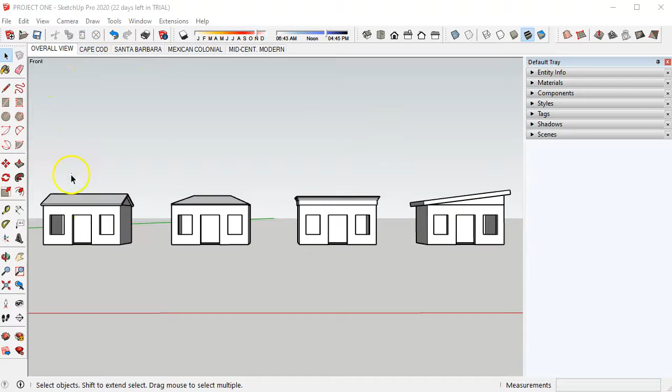In this video, we are creating a window so we can later install it in our openings. I like to get close to one of the homes. I'm going to pick Cape Cod.

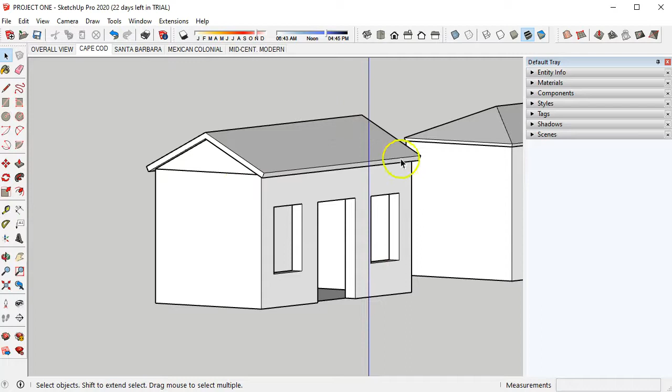If you remember, in our Scene tab, we made our view a parallel projection. If we leave it like that, when we start to orbit, it distorts the house a little bit. You see it looks a little strange up here. So I'm going to switch that back to perspective. I like working in perspective.

I'm going to zoom in back to where I can see one of the openings and draw a rectangle right over the opening like this. I'm not editing anything.

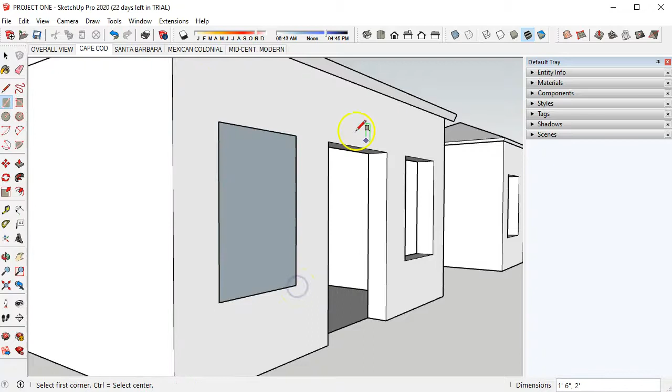I'm going to double pick so I can pick the surface and the perimeter, and then go to my move command, pick the corner, and move it out somewhere around there.

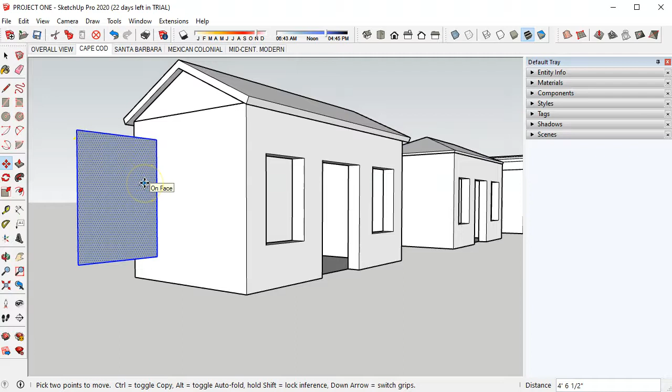Now I want to look in front of this, so I'm going to maneuver myself a little bit here by panning, orbiting, and zooming in. Don't work from a distance like that. Always zoom into your object for detail work.

I'm going to select out here. I don't like working with something selected like that. Don't worry right now, because this is the wrong color. We will take care of that in a minute.

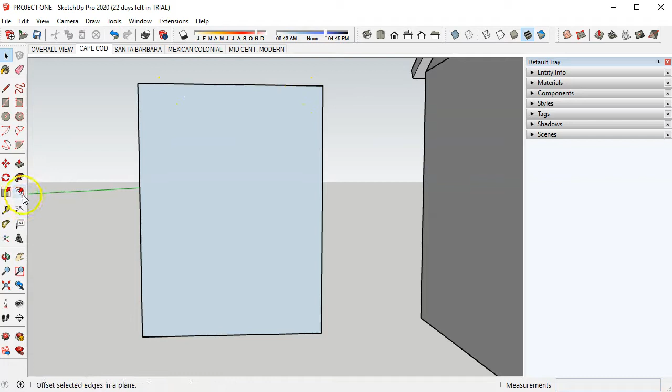To begin making the frame, go to Offset and pick anywhere on the perimeter. Everything is going to be inside the perimeter. If you go outside, it's not going to work and your window will not fit. So inside is where we're working.

So the instructions want you to offset that 3/4 of an inch. Just move it, I'm not holding my finger down. Just move your mouse like this and then type in 3/4 of an inch or 0.75.

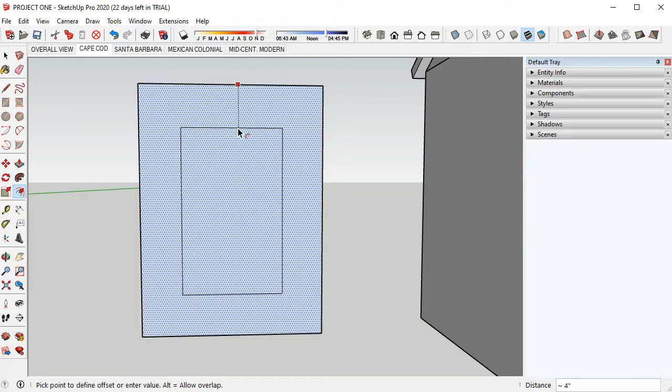We have another offset for the frame. I'm going to pick on that edge that I just created, move it inside again, and type in 1/2 inch or 0.5.

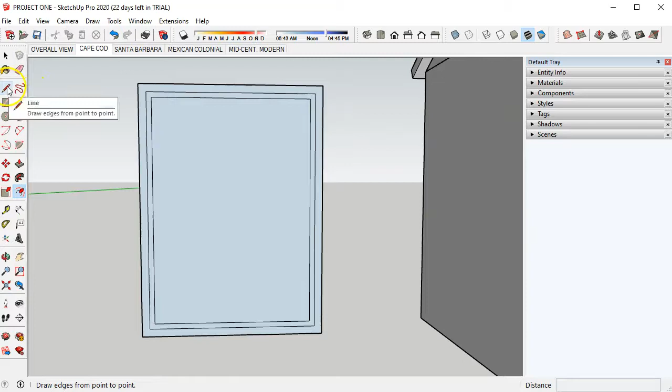Next, we want to divide this inside part equally by picking on the midpoint, top and bottom, and then on the horizontal midpoint from there to there.

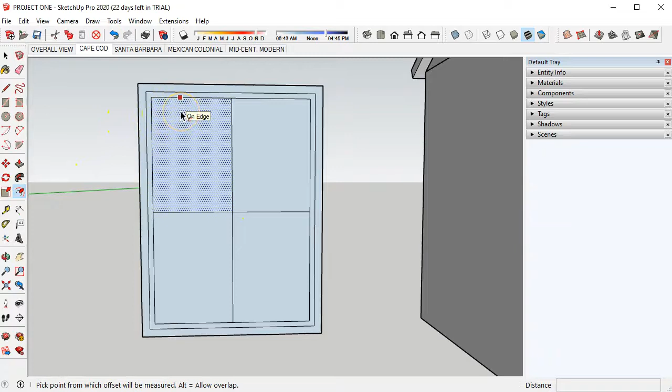Back to the offset, and we're going to pick on the perimeter here of the rectangle, move it inside, and this time it's going to be 0.25 or 1/4 of an inch.

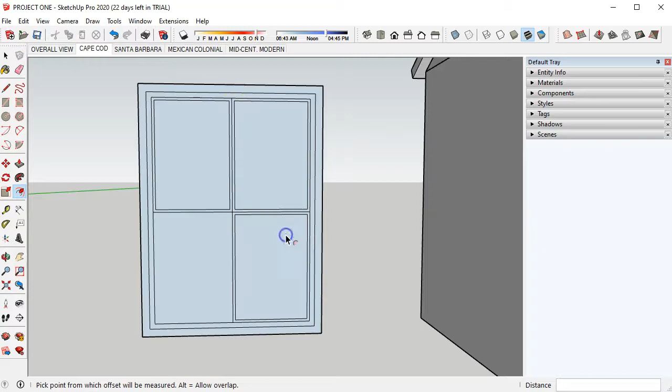If you come over here, all you have to do is double pick. It remembers the last offset. So if you have a lot of these, it makes it easier if you just come over here, double pick, come over here, double pick.

Now we don't need our guidelines anymore, so we're going to erase those. I'm going to get a little closer and pick right in the center, and I know that they're all connected, so that selects them all like that.

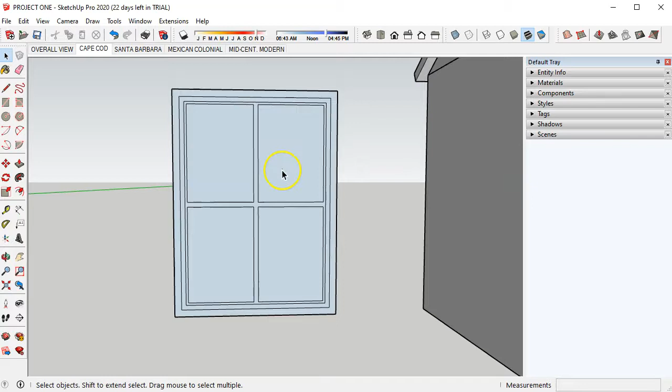Later we will add glass, so for right now I'd like for you to select these and delete these 4 surfaces.

So far so good. Everything is flat, it's on the same plane, and now we need to push-pull some of this to give us depth to our window frame and our muntins here.

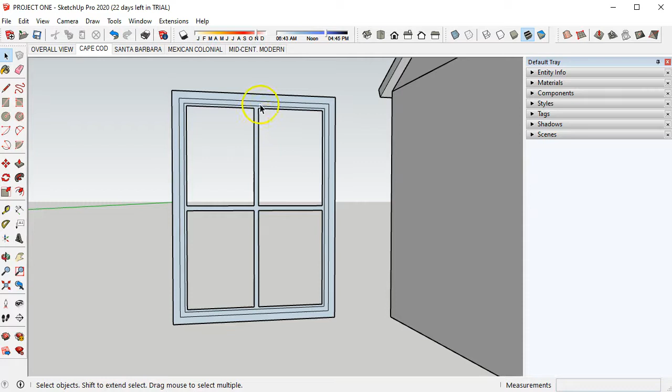So I'll probably start with this here and go to push-pull, pick on the muntins, and the instructions want you to pull those out by 1/8 of an inch, which is 0.125. Enter. Now if you get close to it, you can see that little thickness there.

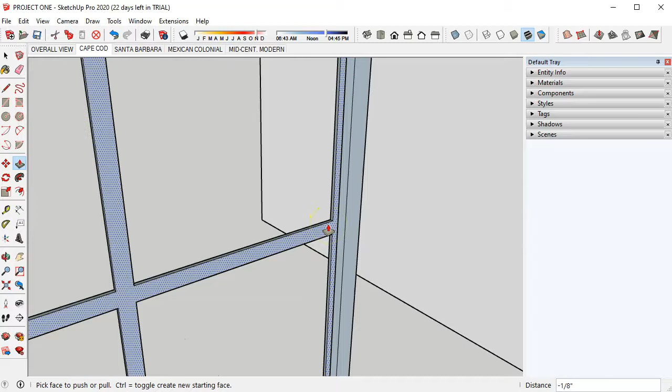So next, what I would do is this outside frame, pull that out by 1 inch. And then this other part of the frame, the inside part of the frame, pull this out by 1/2 inch, 0.5.

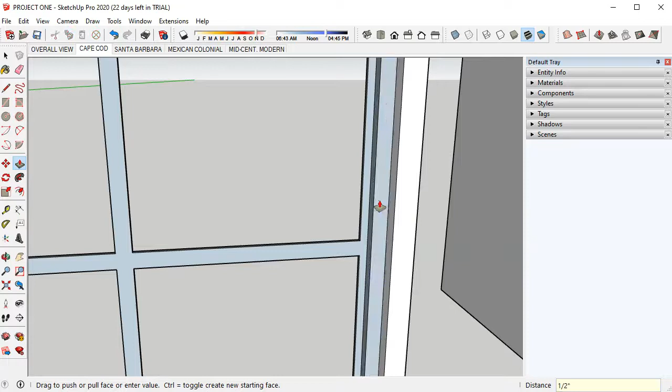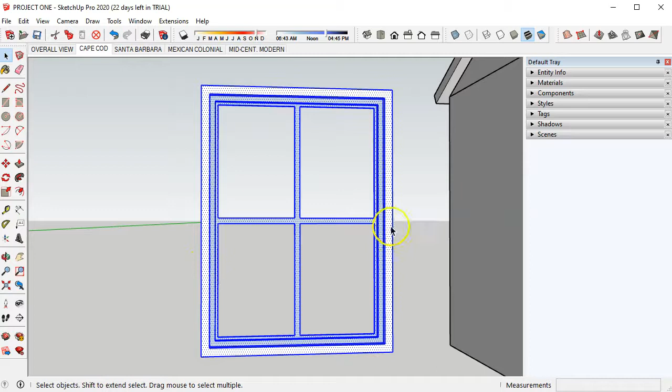Remember that we need to see all white surfaces all the time, so we need to reverse some surfaces here. If we triple pick this, it selects everything, but we already have some white surfaces here. So I'm going to hold down my Shift key and get close to a corner like this in Orbit so I can pick these 3 surfaces, or rather deselect them by holding down the Shift key. Okay, these are already selected, and those are the ones we want to reverse.

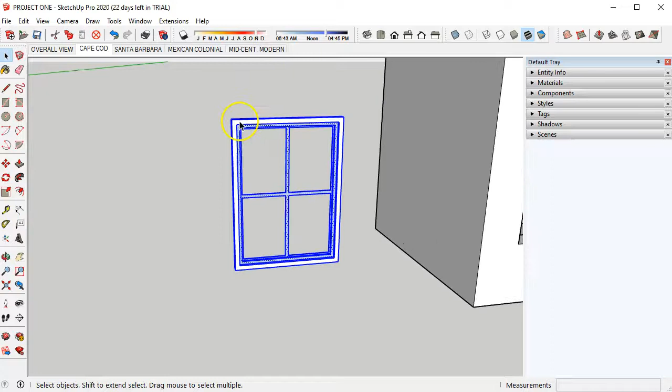So we need to zoom in on this corner and deselect these 2 surfaces. Hold down the Shift key, select those, and I can still see some dots in there, so I'm going to orbit just a little bit more and do that again. So that's what it should look like. Now I wouldn't worry about, you see this line here is not selected. That's okay.

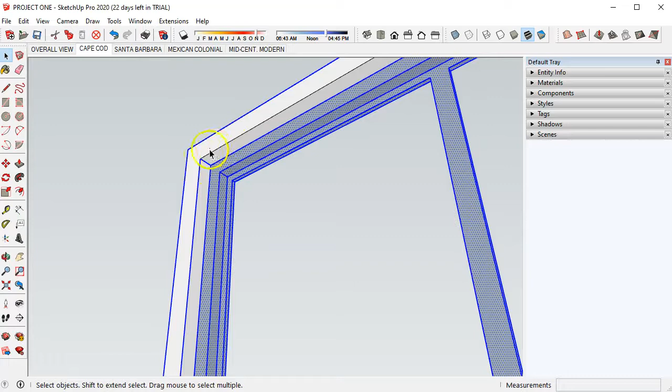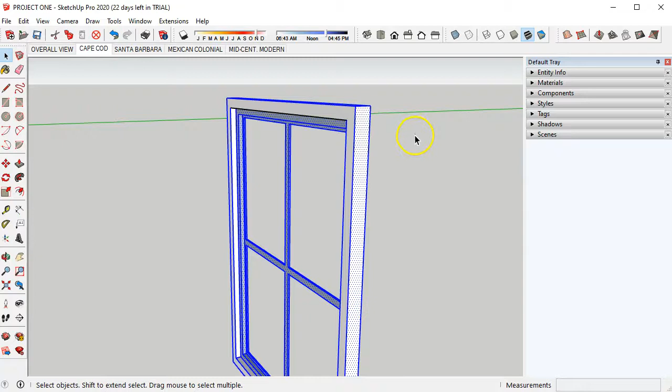And if we zoom around, I think that's all we need to deselect. If your sides here are that darker color, the blue-gray color, don't worry about that. We are not going to see this, and it's going to be on our opening, so we don't need to worry about that, whatever color it is.

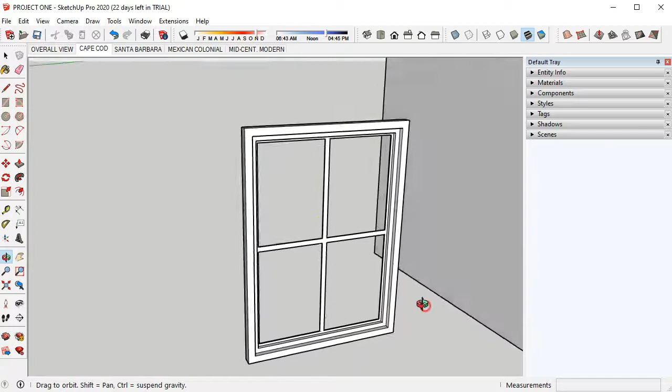All right, so I think I'm ready to reverse faces, so I'm just going to place my select icon there and right-click and go to reverse faces, and then deselect out here. Give it another look around. I like to orbit to see all the surfaces, and you see how that changed like that. Don't worry about that.

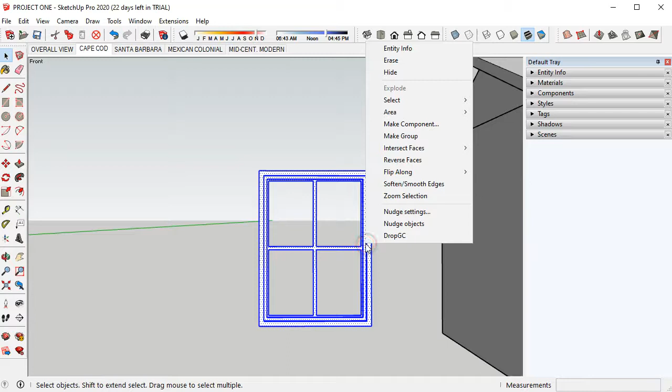Okay, so we're good to go, and the next step is to make this a component. So I'm going to window the whole thing, right-click, and make component. Now we're going to call this the frame because we're going to also have a piece of glass. So I'm going to type in frame, glue to any, and make sure there's a check mark there, and create.

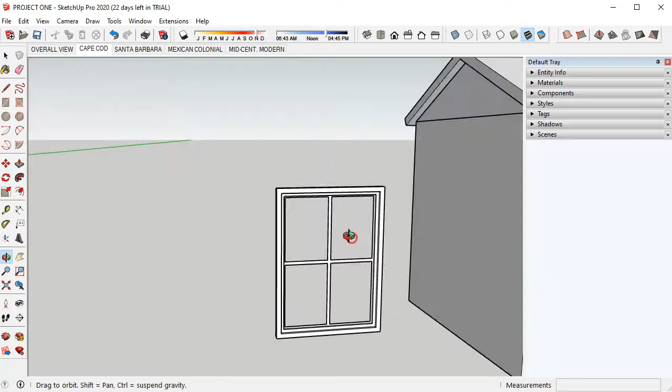Okay, I'm going to deselect that out here. I don't like to work with something selected. If I select it, it is now a component.

Now we need to make the piece of glass, and we're going to do that by coming around the back, orbiting and getting close to it. Something like that, that's fine.

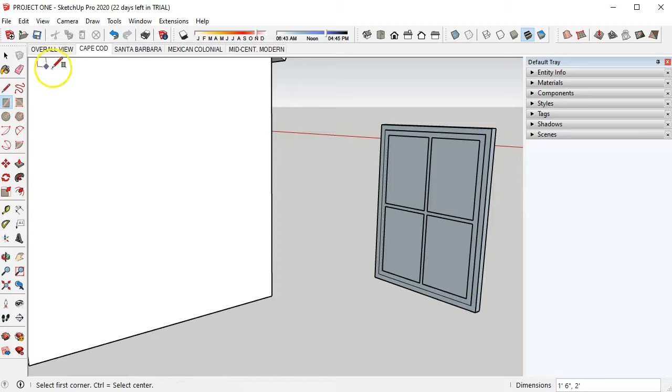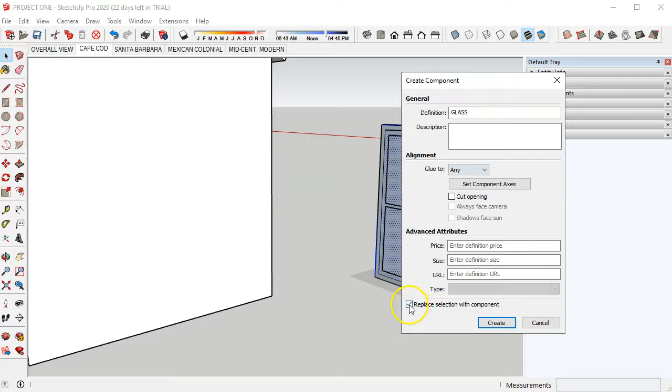And this time, without editing, we're making another surface and pick the outside corners here. Double pick that, so we want to pick the surface and the perimeter, like that. Right click and make component. This time it's going to be the glass. And glue to any, and make sure the check mark and create.

Okay, so now we have all white surfaces here, and we are only going to be looking from the outside in, so we don't need to be concerned about this being white.

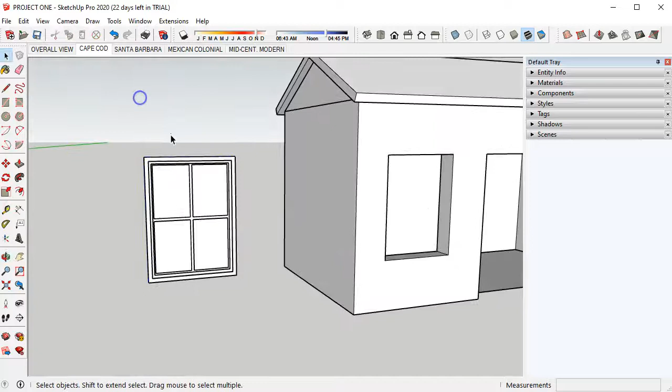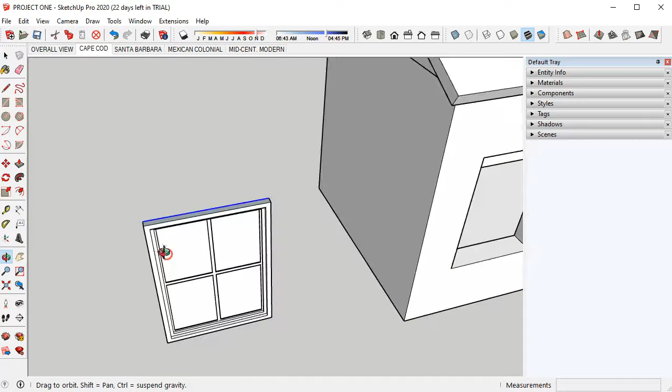Now, the frame component and the glass component, if you notice when I selected this, you can see a little blue line here that indicates that there's a component there. So if I select that and right click and hide it, it hides that component. Okay, I'm going to undo so I can get that back.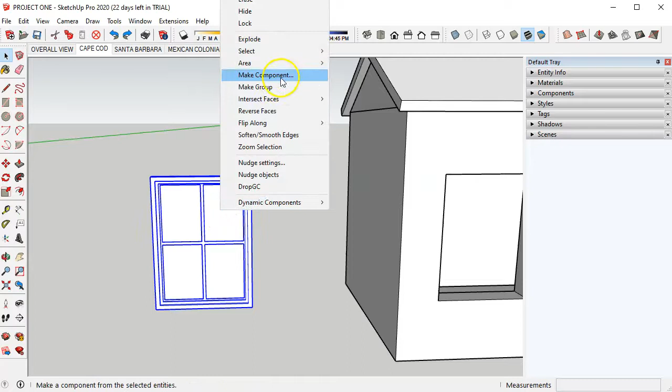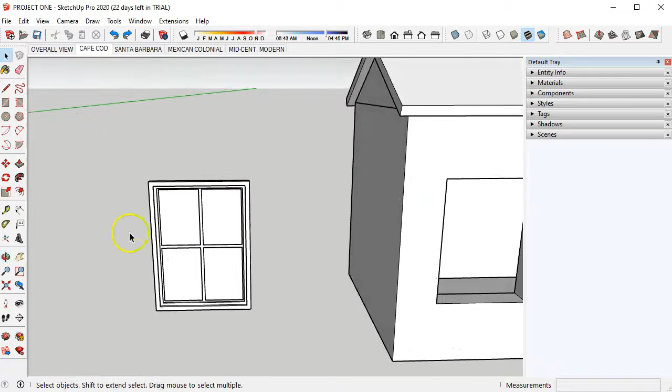We have a frame and a piece of glass, and for right now that's all we need. So we want to make those two pieces another component, so I'm going to window both of them, right click, make component again, and this time it's the completed window, so I'm just going to write window. Again, any, and create. Okay, so we made a component out of two components, and we named that last component, the final component, window.

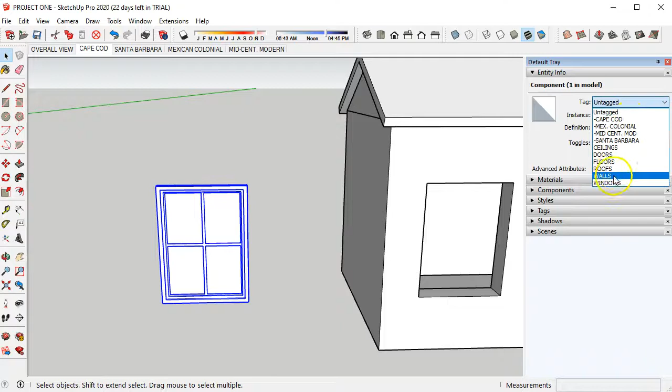The very last thing you want to do is to place your window in the correct tag. So select your window, go to Entity Info, it's untagged, so drop down to Windows. Now it's in the right tag, and it's ready to be installed in the next step.